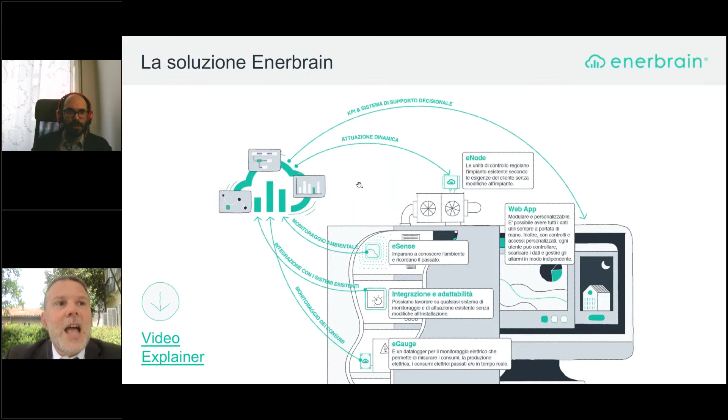We made a really interesting project together with Iren here in Turin. It's in the slide, I guess 2 slides from here, and it's been particularly interesting. As you can see, 89 buildings had the system installed in 4 weeks, with not a single minute of downtime or stop of the machine.

Also, this was in February, and we're talking about heating systems in public schools and public offices. Despite all these constraints, we were able to get the system installed, and after about 1 week, we immediately saw the difference in terms of regulation.

The users found immediately a better comfort, meaning on Monday morning there weren't any more calls complaining about the cold school or cold public offices, and we achieved an important saving from this new kind of regulation.

The most relevant thing from a social point of view is the CO2 emission reduction, which was basically the same as if Turin had doubled its own portfolio of trees in the city. And Turin is probably, from my knowledge, the greenest city in Italy.

So it's been quite important, because when we talk about climate change and real action, we got this kind of result on only 89 buildings. So just think about how many public buildings, considering only public administration, we have in a city like Turin, or in any other city all over the country, all over Europe.

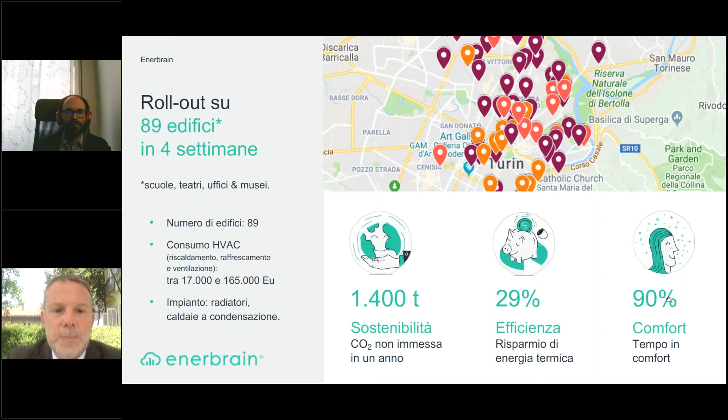And now the challenge, the big challenge, on one end is to keep doing what we call our core business, which is perfectly wrapped up by this use case. And this is the next step.

The next step is to develop the capability to orchestrate at the same time, close to real time, not only one single building, so not only a dynamic optimization of the HVAC of one single building, but put in relation any kind of energy consumption, above all electricity, also because hopefully we are going to see in the next years an electrification of heating systems, also in residential, also in public administration, as in private business we already saw during the last years, because it would be crucial for CO2 emission reduction.

And so we are working, as I said, we don't have the product, we are working on it, but we are quite close, honestly, to orchestrate different buildings, different objects in the same network, optimizing the same target, which is obviously comfort. You cannot make energy efficiency putting people in cold or in overheating, and also reducing CO2 emissions through the reduction of energy consumption.

There are a lot of strategies, a lot of schemes to do that. There's a huge talk these weeks about demand response in terms of electricity, flexibility on the electricity market. There's a huge talk about energy communities also. And in our opinion, all these topics are going to converge, and the driver is basically digital technology, because otherwise there's really no way to enable that.

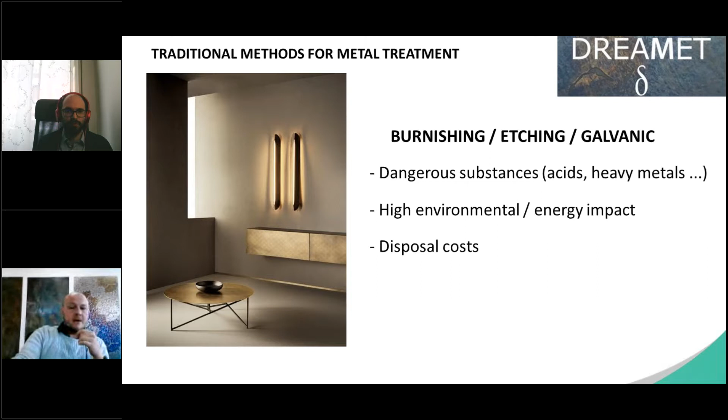First of all, the use of acids and other dangerous compounds like heavy metals, chromium-6, and so on. The high environmental and energy cost. I think about galvanic treatments. We're talking about hundreds or thousands of amperes during the process, and of course disposal cost. Another technology very well known to create decorative applications on metal surfaces is punching, the mechanical procedure, but we have, of course, some limits.

It's a very interesting technology, a very controlled technology, but of course you have a limit on the detail of the image. So on big building facades this could not be a problem, but for interior design or other applications with a very high request of detail of the image or of the finish, it's not suitable. Of course, it's not suitable in case of the need of a continuous surface, so not a hole. And of course, it's a process made by big punching machines, so you have an energy cost and a processing waste.

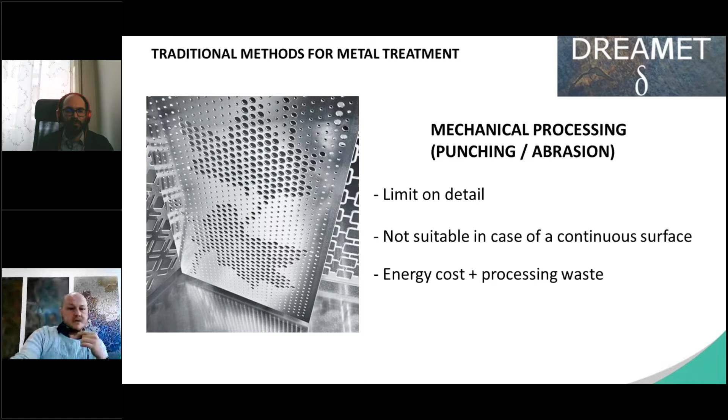What we do as Dreamet is totally innovative. I will show you also the experimental results coming from more than 10 years of R&D in cooperation with the major universities here in Italy. And this is an example of a building covered with Dreamet metal surfaces. See, there is a tree decoration. So let me introduce you this innovative startup, which is called Dreamet.

This is our dream becoming true through the metal, and also the customer's dream coming true through the metals. We are an innovative startup. We have all the three requirements from the Italian law for being an innovative high technological startup. And we have three fundamental pillars, which are innovation, tradition, and ecology.

We're looking very much for ecological processes. We do not use acids at all. We do not use high consumption of energy at all. And everything which is produced here in Dreamet is totally controlled, and practically we have zero waste. So this is our policy.

The applications, as I already told you, go from architecture to building facades and interior design, floors and coverings, up to restoration and heritage. We also cooperated for the restoration of a very ancient cathedral in Middle Europe, a Romanesque cathedral, which was a UNESCO heritage building. Here, some applications, because of course, as usual, images talk better than 100 words.

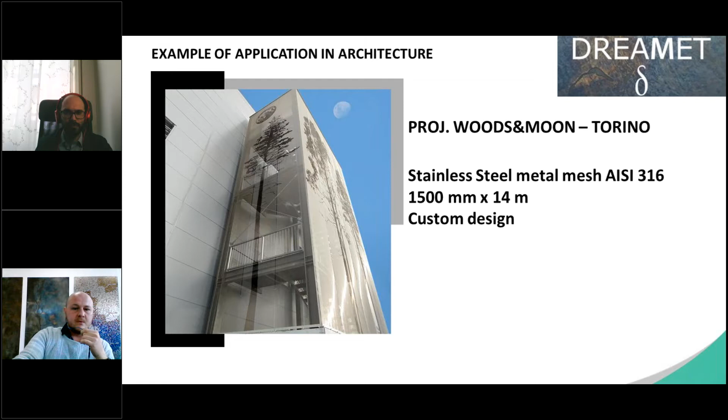And this is a project made on stainless steel metal mesh, so we do not treat only flat surfaces, but also metal meshes, as this one. This is a company. It's the external safety exit of a company near Torino. And all this drawing on it, this Woods and Moon project, drawing the picture of this application.

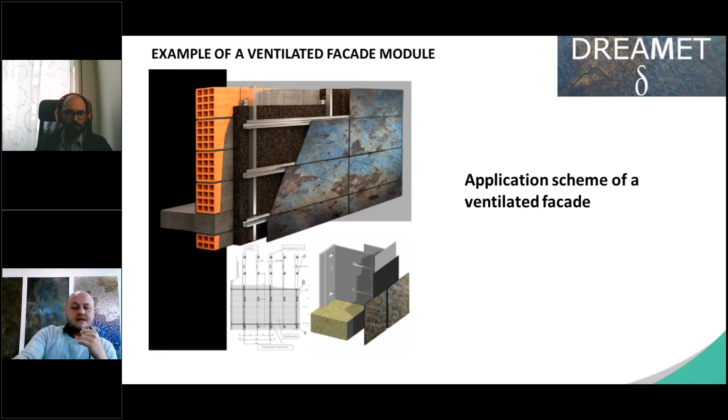Of course, this application can go on vented facade systems, and this is very interesting because in this application we are developing an idea of the Politecnico di Torino, which I thank very much for this cooperation, and I will show you an image later. This is a real module of vented facade made by our technology. This is again stainless steel because, of course, if you go on external applications, you have to choose metals which are already suitable for external use.

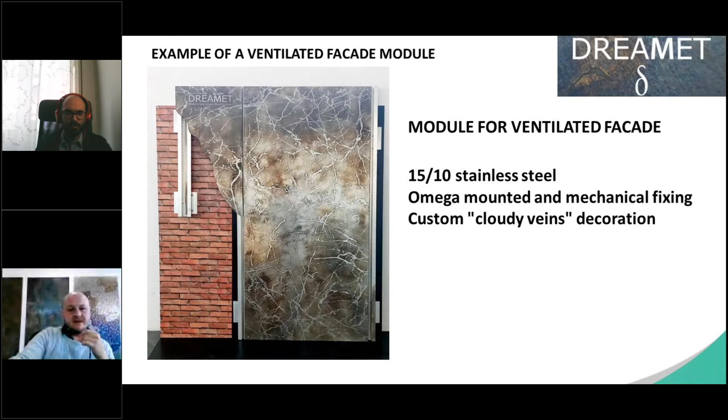In this case, there is a custom cloudy veins decoration. As you can see, you can recognize this is not an acid etching or some other known technology. In fact, as you maybe can see from this image, everything here is flat. So you see an image on the metal, which can be a metallic image or a very defined picture. But if you would touch it, it would be totally smooth, so you don't feel anything, any etching, any mechanical scratching on it.

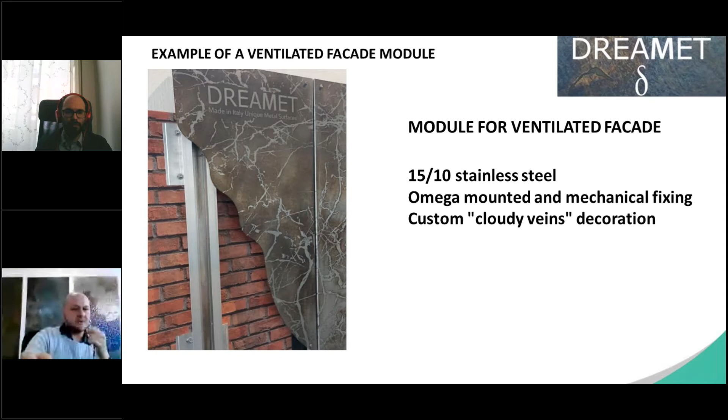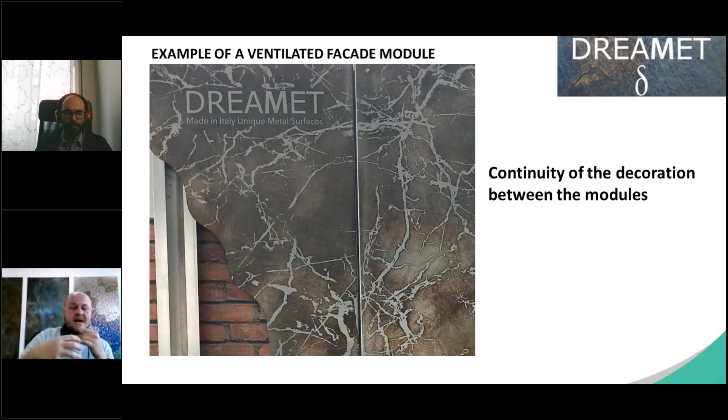Again, here you can appreciate the continuity, because we can control everything we do on the metal exactly as it would be a printing, let me say. So you have a continuity in the drawing, which can allow us to create very big designs on the building facades. This is the image of an innovative system that we are developing in cooperation with the Polytechnic of Torino, which I thank again.

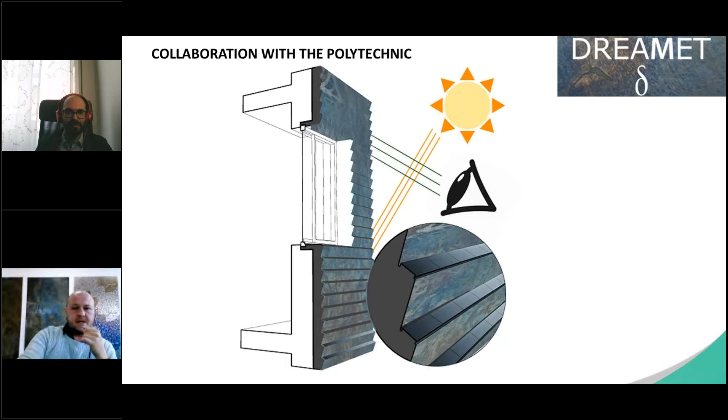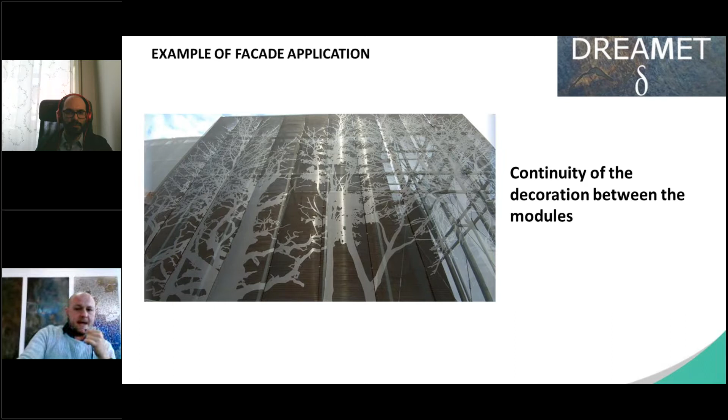And here the idea is to bond the Dreamet technology on these facade modules to allow the watcher to see something nice from the ground, meanwhile the wall is producing energy. Again, here is a realization on a building. This is the Nokia building, the telephone and communication company, in a city between Monza and Milano. Again, another application of this continuous decoration on building facade.

So we know everything about the metal surfaces. I will show you soon. To close, this is an application of heritage restoration. This is a private villa on a small island near Sicily. And here there was the necessity to use a particular finishing, which was like the Corten steel, but all this work will be done with our innovative Cortenox steel, which is a stainless steel, which looks

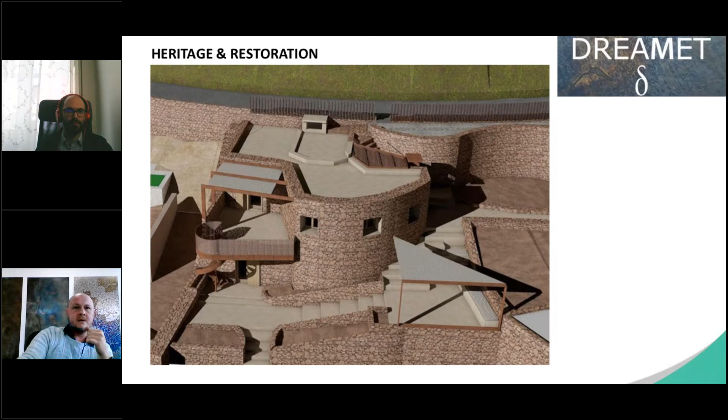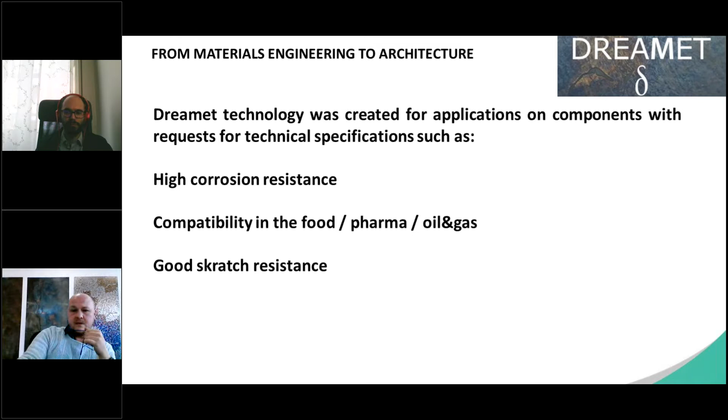like Corten steel. So as I was talking before, all of these finishings come from material engineering. So before going on the market, everything has been tested for high corrosion resistance, compatibility from food to pharma to oil and gas applications, and even a good scratch resistance. So our metals become even better after our treatment. There are some applications: titanium, copper, brass, aluminum, and so on.

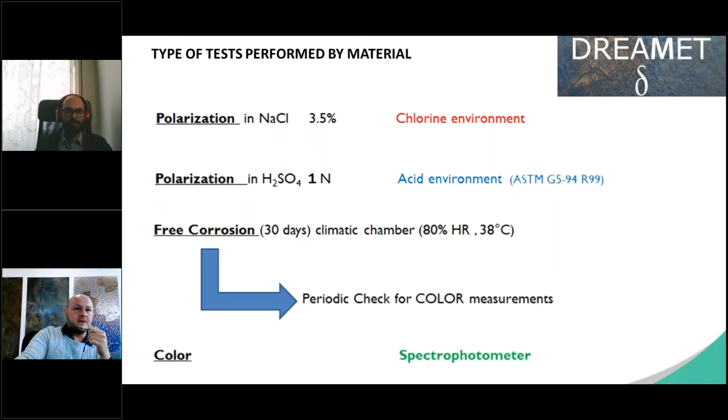So going to the scientific part, which is also very interesting and important for us. Mainly, we test all our surfaces for corrosion resistance through polarization tests in chlorine 3.5%, in H2SO4 normal, which is granted by the ASTM G5-94 norm, and also free corrosion resistance with a periodic check of color, because what we guarantee, going on external and building facade applications, is almost 20 years guaranteed; in fact we can guarantee it for eternity, as long as the metals last, so as long as our decoration lasts.

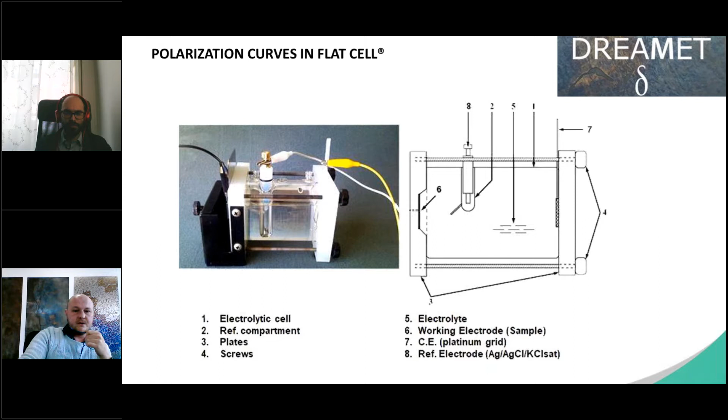The polarization curves have been realized using a flat cell system. So it's a 3-electrode system made by a reference electrode, which is an AgCl in KCl saturated system, a grid of platinum as counter electrode, and the working sample as second electrode. From all of these curves, what can be seen is that mainly there is always a better behavior, especially in chlorine, of the decorated metal.

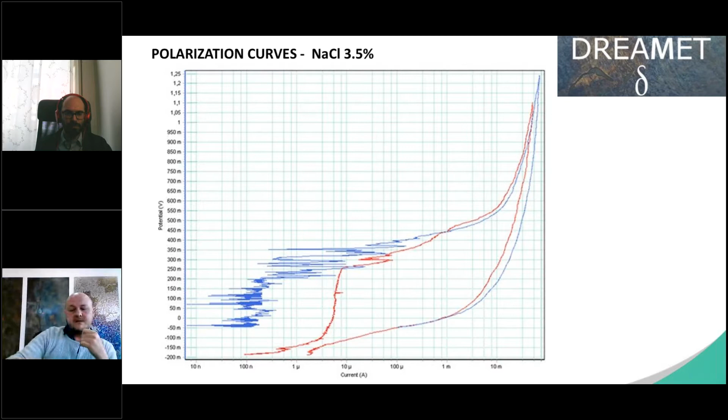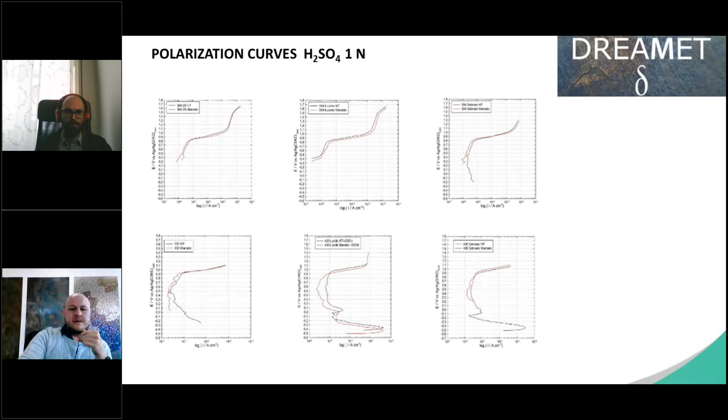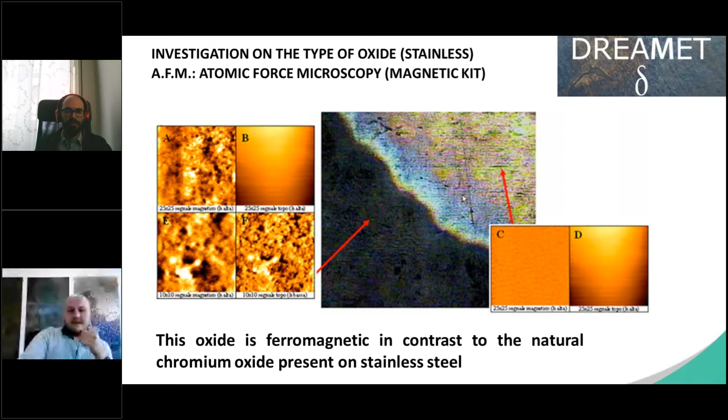So from all our tests, we can conclude that what we do makes the metal even much more resistant near the sea, in chlorine environment, and even in acid environment, as you can see here from the curves in sulfuric acid. After that, mainly on stainless steel, we did an observation of what we create exactly inside the metal surface. So we had an inspection with the AFM, atomic force microscopy, with the magnetic kit, and we saw that the oxide that we create is very similar to magnetite. So it's a modification of the original magnetite, but with the insertion of other compounds inside this crystal of the stainless steel.

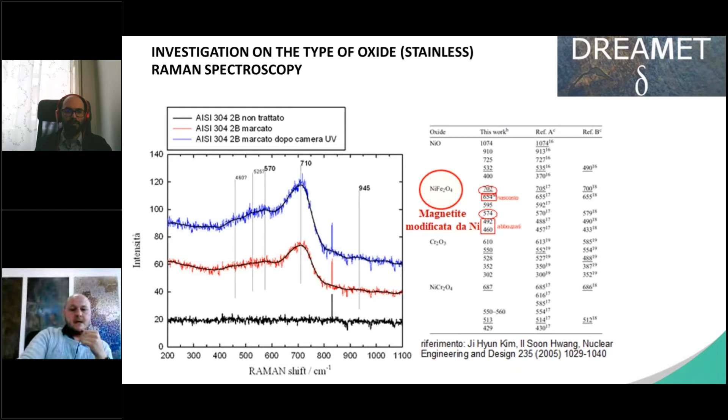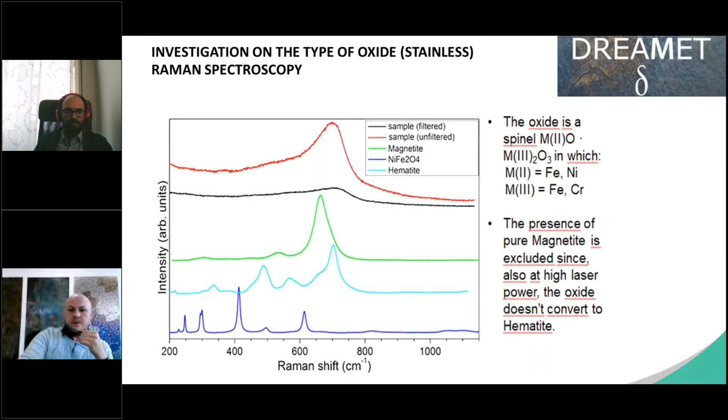Okay, here is again what I was just saying, that we made this Raman spectroscopy to see exactly what we were creating. Last, we checked the color, because as I was saying before, we have to guarantee that our metals don't change during all the life of the building facade, of the floor, of the coverings that we are going to do. And from our checks during all these experiments in climatic chamber, and I can say now after several years also in reality, in all the applications that we did, we can guarantee that there are no changes in the appearance of the color, even in external applications, even near the seaside or on the seashore.

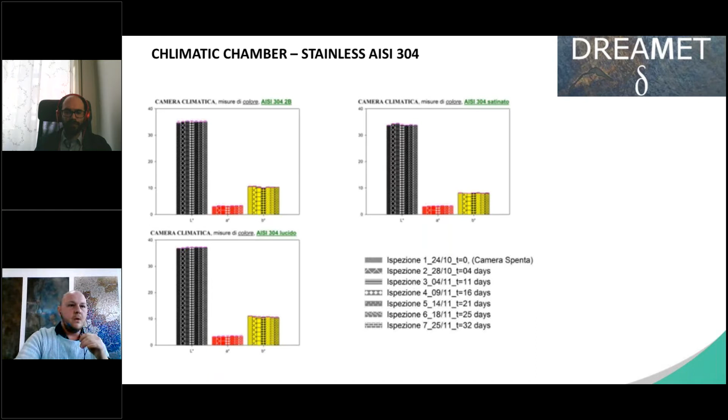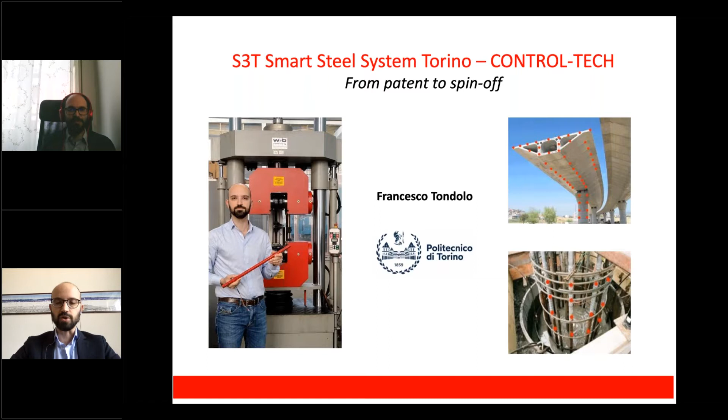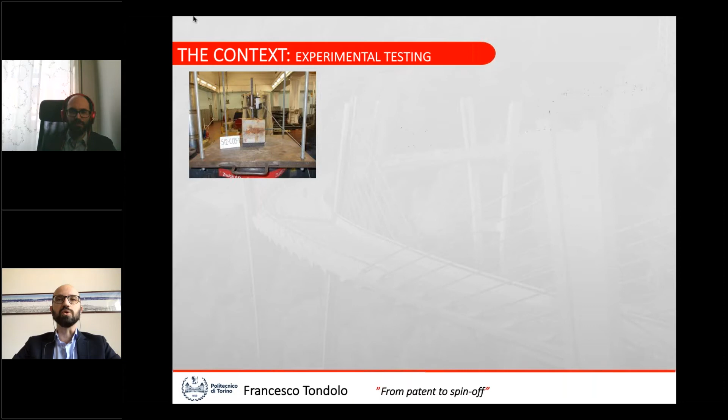I was working also on a paper from 1951 to design the best test for bond. In this paper, electrical strain gauges were glued into an internal groove of a reinforcing steel bar, and I was literally fascinated by this technology.

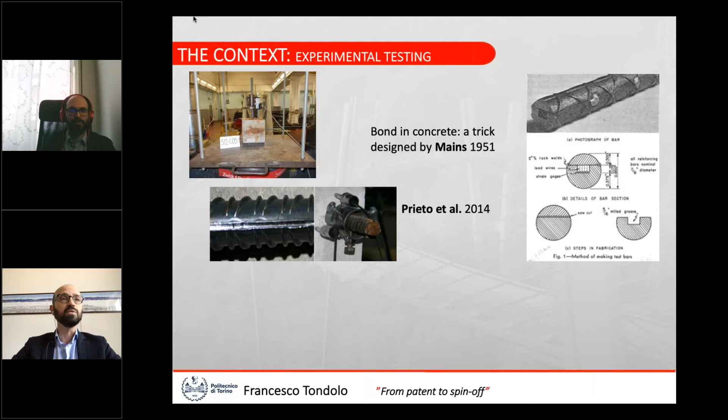Recently, in 2014, fiber optics were positioned in the longitudinal rib to measure the strains in steel in other kinds of bond tests. Again, it was still a way to understand what happens in a reinforced concrete structure.

But a few years ago, the same technology was used for an experimental campaign, the same experimental technology where the electrical strain gauge was again glued into the steel bars. So the experience says that there was no way of reading strains better than this technology.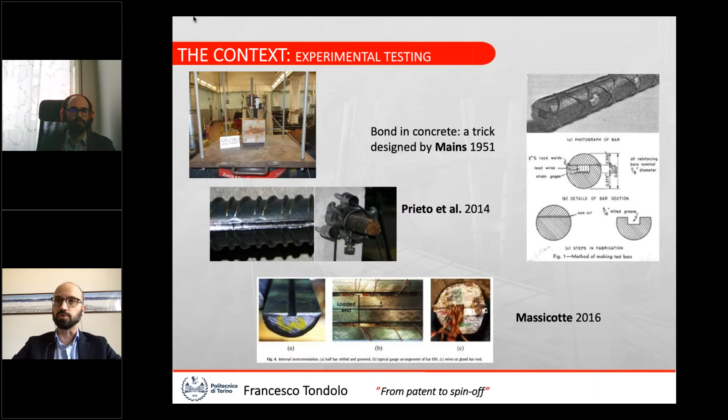So working with steel was good. That was my research. Furthermore, I was involved in a large research project to develop sensors able to read stress and strain in concrete for monitoring of concrete structures.

Rheological effects make readings even more difficult and uncertain, and the specificity to have an eventually small innovative sensor is definitely not usable. Furthermore, concrete has a negligible tensile strength. Cracking close to a sensor can give no readings in the tensile strain field. Indeed, it was hard to act against strain and stress fields in concrete of the order of megapascals.

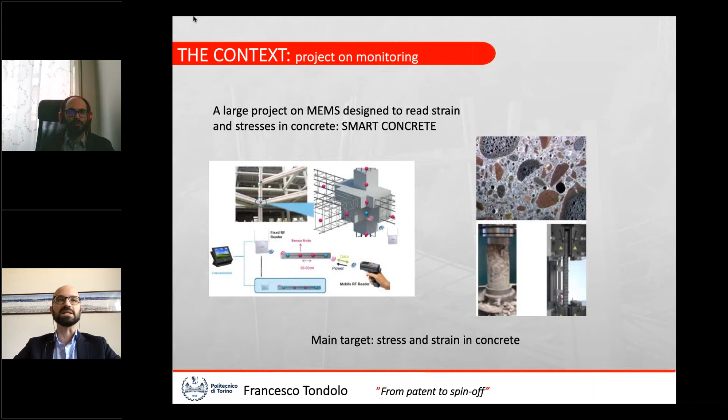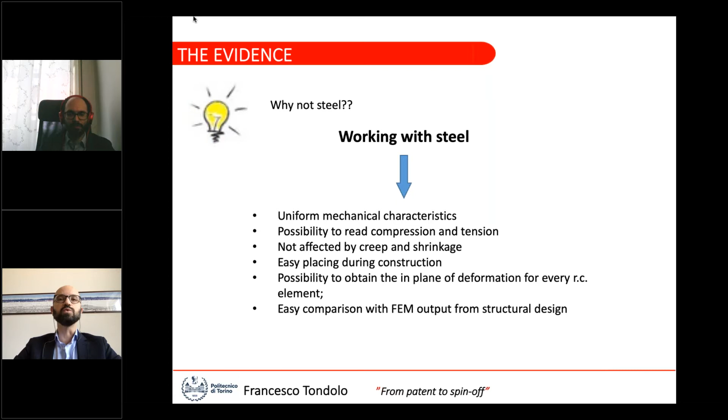But an innovative way to work with steel was still needed. This is why I would like to introduce the theoretical basis of the invention. That is, it can be explained by thinking about a bubble of air, a bubble of air captured into the steel bar under uniaxial stress.

This uniaxial stress and strain field modifies the volume of this bubble. Therefore, if it is possible to measure temperature and pressure in this bubble, it is possible to reach the volume variation and therefore the strain into the element.

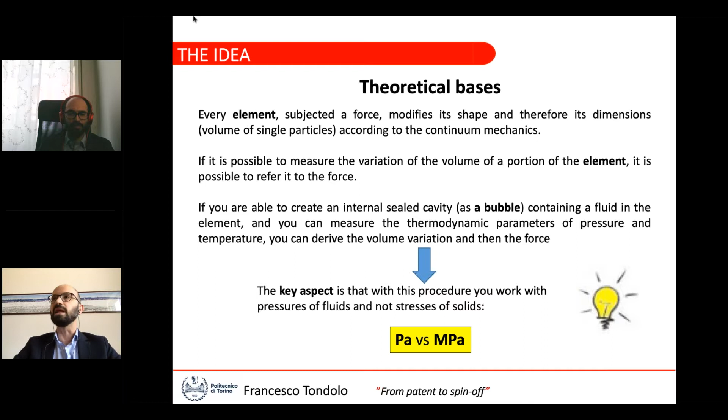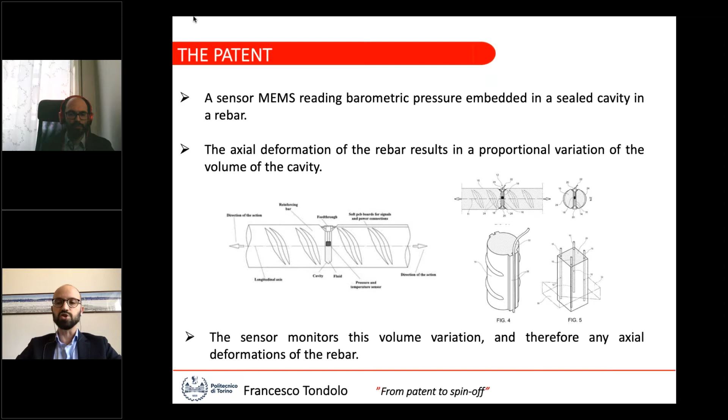It is important in this element to build a sealed cavity and put inside a barometric pressure sensor. We started using a very low-cost sensor for the consumer market. The patent was filed in Italy and then extended through PCT, and it is on its way to be granted in the USA and Europe. But the path was not so easy.

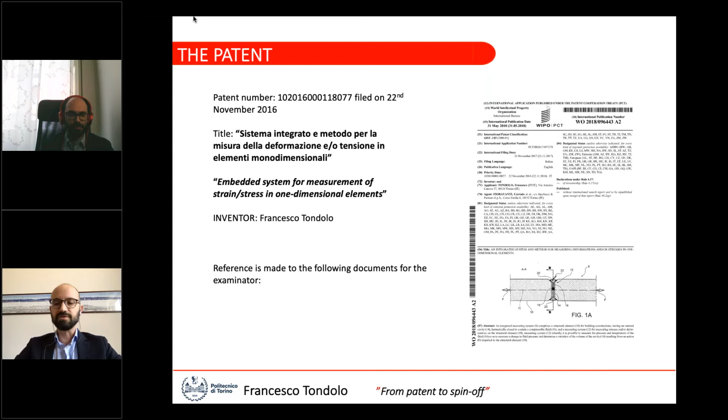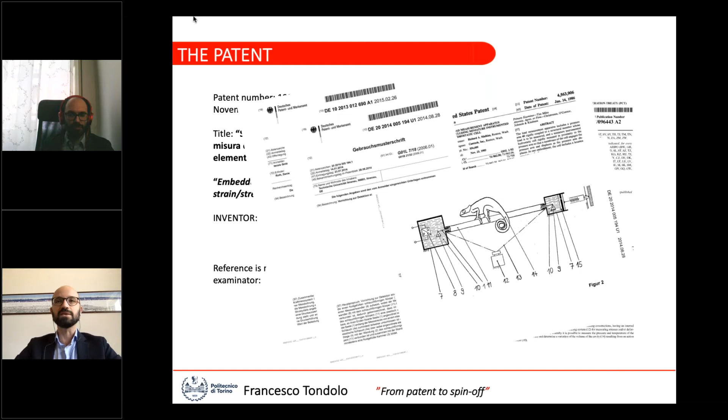The first revision from the EPO office gave reference to 3 other patents, I have to say, chameleon included. But after discussions, at the end, with minor changes on the text and a lot of explanations, the claims were accepted.

So in the meanwhile, activities on the research side took place with a lot of prototypes built to test the system and its sensitivity.

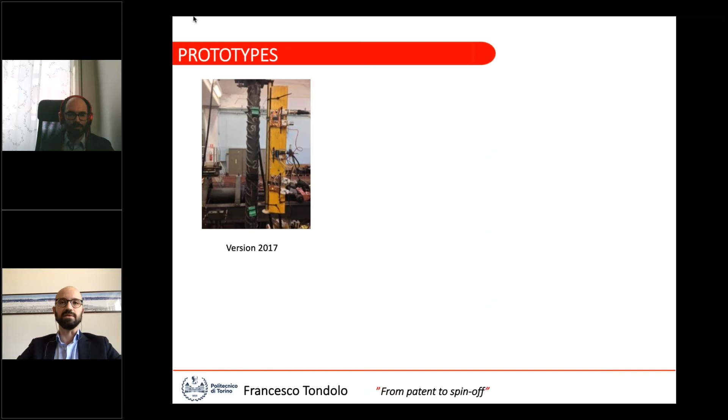From a reinforcing bar with diameter 40 millimeters, which gave more space for electronics, you can see in the first picture on the left, to a reinforcing bar with diameter 20, with good miniaturization of the system, and also with this dimension it was ready to be used in all construction sectors.

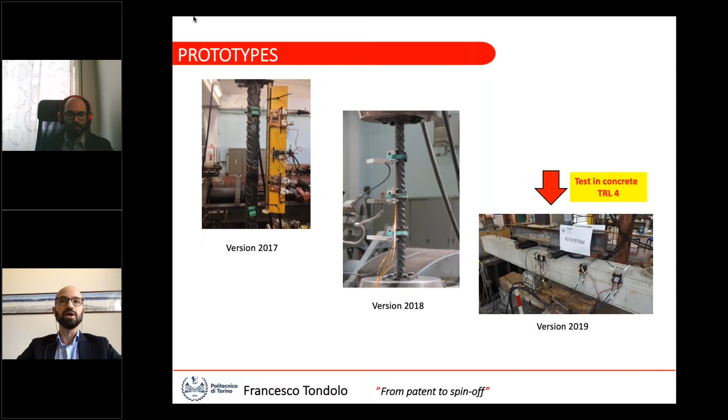Finally, to a concrete beam, the test in a concrete beam set up the technology readiness level to the value of 4. That is a good, very good level.

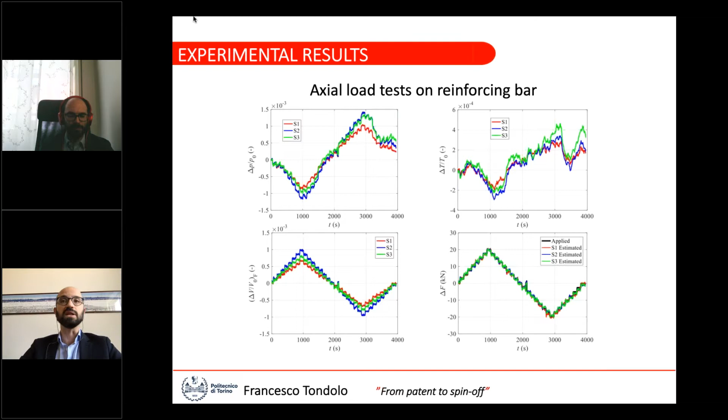In this slide, you can see the good experimental results that testify to the use and effectiveness of the system, and gave responses to the theoretical assumption, and pushed to move forward. In the graph at the bottom right, you can see the comparison between what was estimated by the sensor and the applied load to the testing machine in the laboratory in a uniaxial test with compression and tension.

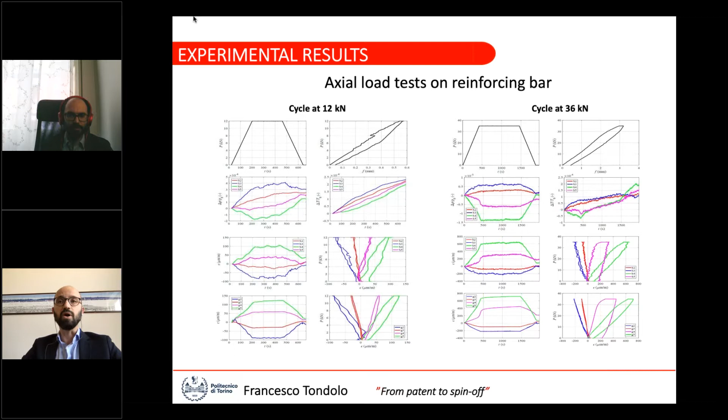Good results. Therefore, together with the research group, we started to study all possible applications of this technology, also in the professional field, not only for research, and we discovered multiple applications of this device for monitoring. We discovered the problem of the current structural health monitoring.

The problem is related to the fact that monitoring for structures and infrastructure is expensive, not always reliable, but at the same time is increasingly requested. Recent events on structures demonstrate how it is more and more important for every phase of service life of the structure, starting from construction. Despite a large number of collapses recently registered, I've decided to put a picture with a case of a collapsed structure, the Fossano Viaduct, without death. Indeed, it is not so easy for a civil engineering structure to not have loss of life when a collapse takes place.

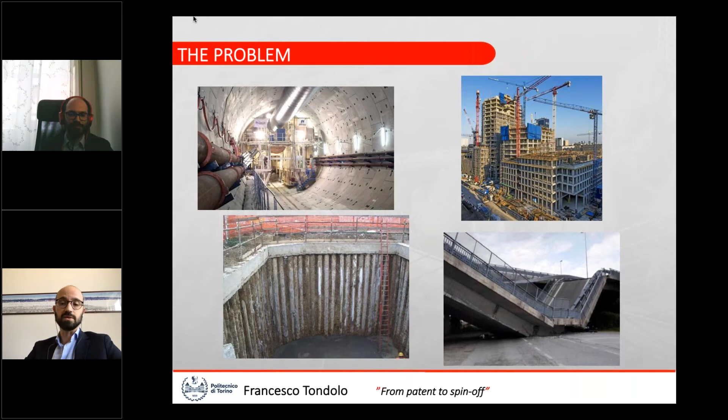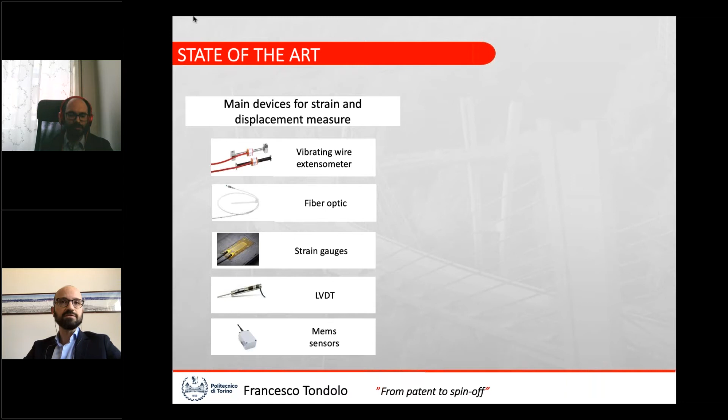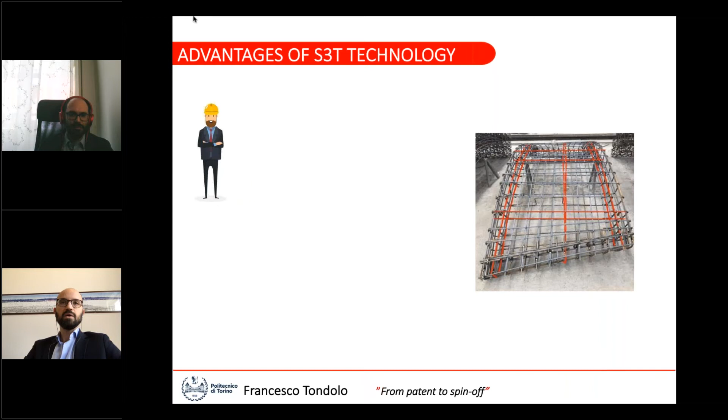Traditional devices monitoring strain in reinforced concrete structures are expensive and not so easy to install, and therefore a small number of devices is generally used for monitoring. With the solution developed at Politecnico, the monitoring system is cheap, simple, and fast to use, protected and ready to be installed on new structures or on existing structures during repairing works. The solution is pervasive because it is possible to have a large number of sensors in every position you need, and also because of their small cost.

The reinforcing bars are the way to connect the sensors among them. Among other aspects, even sustainability of civil engineering assets is improved under the efficient control with this system. It is possible to save material and money and increase the safety along all the service life of the structure.

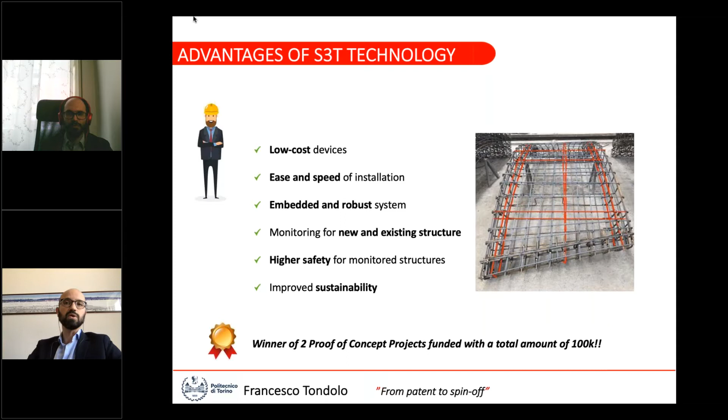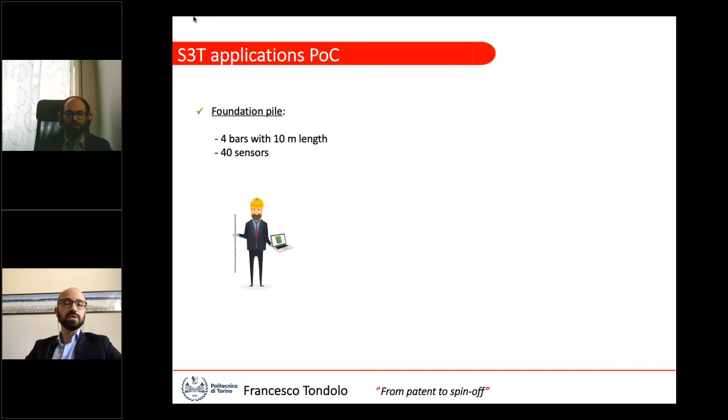The technology and the studies of the context brought to the winning of prizes with a total amount of 100,000 euros of points. There were two proof of concept calls. I would like to show you some applications developed during the first proof of concept with a foundation pile in a geotechnical structure, and the first results are very promising. A large number of sensors has been used for a perfect control of the structural condition. Here you can see the placing of the steel bar cage with the red rebars showing the application that we define as Smart Steel System Torino.

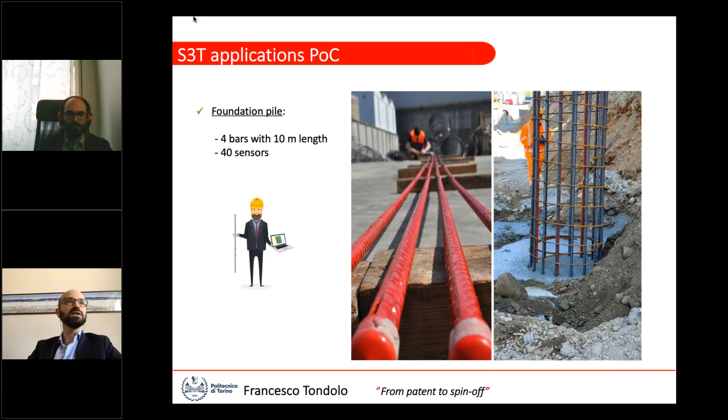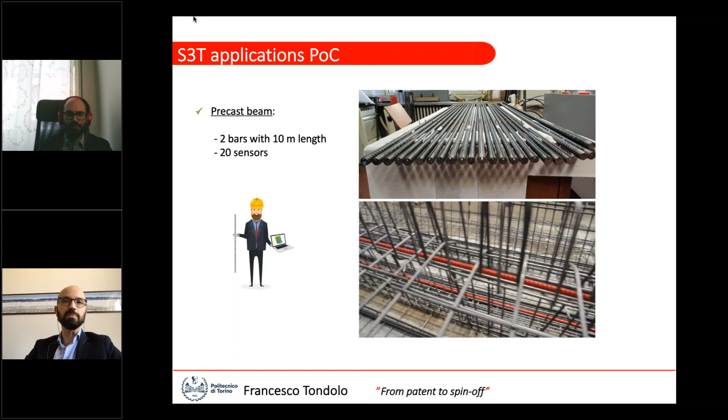Another application under study is focused on precast beams. The system is flexible and represents a new paradigm for structural monitoring of civil structures. There is a large request in all construction sectors, from bridges to tunnels, from buildings to precast elements.

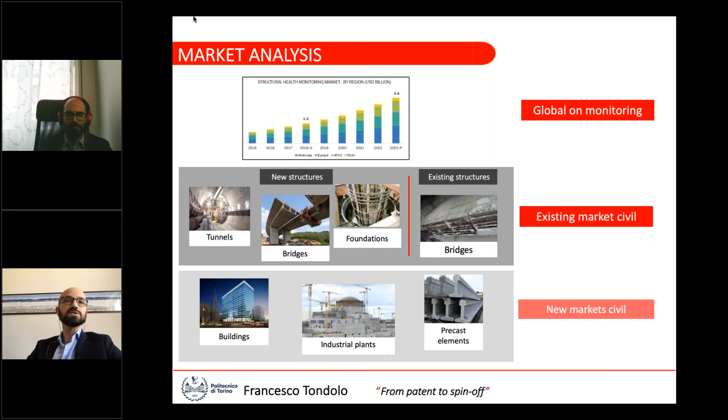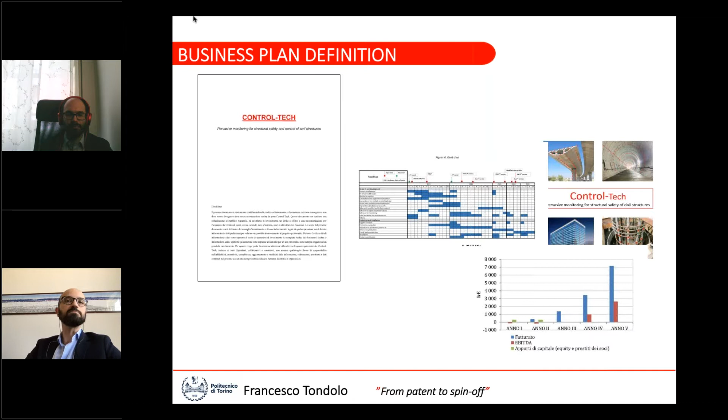All these activities have been collected in a business plan, obviously. The business plan contains all information about exploitation of the patent within the context of a startup, with market analysis, industrial analysis, marketing and organization plan, and finally the implementation and financial plan. The approval at different levels of the business plan brought to the approval as a spin-off of Politecnico di Torino.

And what's next? Well, we don't know exactly, but we are in a second proof of concept project. We are very happy. We are in progress. We gather a lot of interest from customers that we registered. We have the eye of attention on this technology. And the system has already been used to apply for calls in the construction sector, in a submitted project. And we're looking for some fundraising, but probably in the meanwhile, the best thing to say now is that we would like to thank our personal and institutional supporters, and obviously thank you all for your attention. Thank you very much.

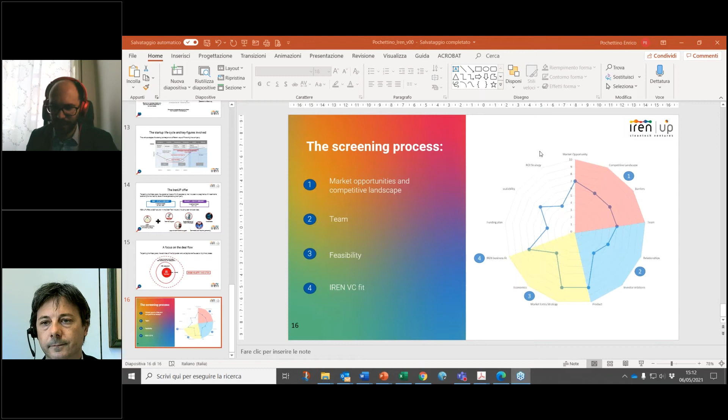Thank you very much. It's also a very interesting topic, essential for the speed up of innovations.

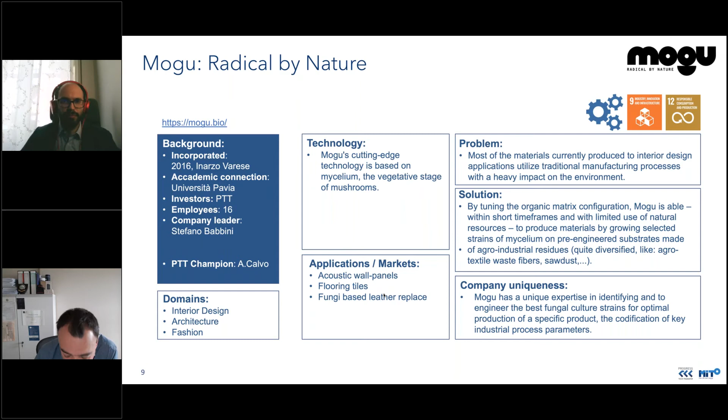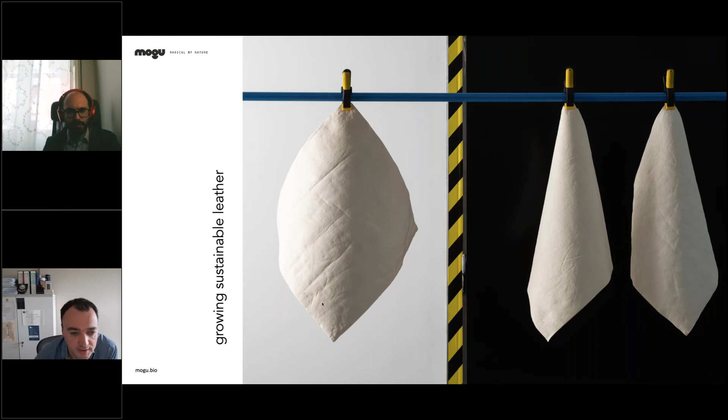So they are looking for opportunities, and MOGU is on the right track to provide this material also to companies which produce very expensive leather goods. But the next frontier for MOGU is also in the food world, because through their technology they are also developing new products for food ingredients. Okay, so this was my presentation.